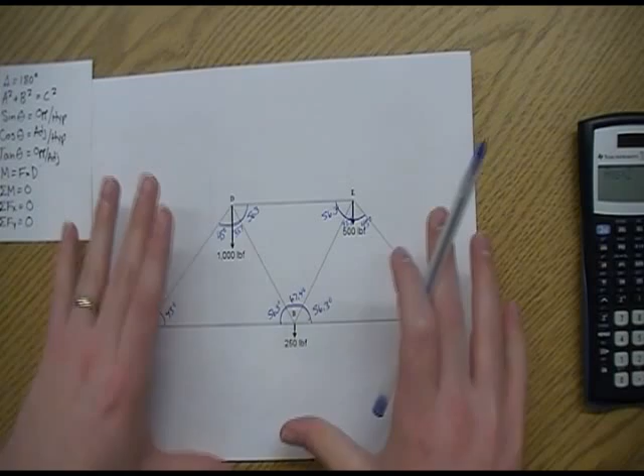Now the problem is this: for these ones right here, there's 2 unknowns, so we can't just say cut it in half and put some here and some here. It doesn't work. We still have to solve for it mathematically because it's not equal forces pushing out. We've got 1,000 pushing here, only 500 here, and only 250 here. So the forces aren't going to be equally distributed amongst this truss, and we've got to figure that out.

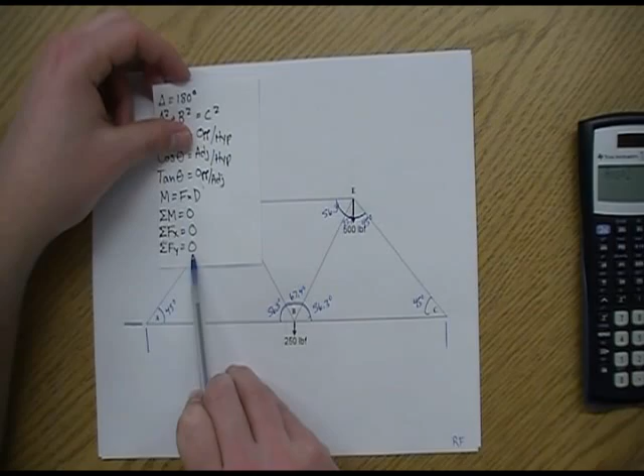One thing we do know right away, we're going to come back to here: the sum of all the forces in the x direction have to equal 0, and the sum of all the forces in the y direction have to equal 0. So I always like to draw this guy in like this.

And you'll see this a lot. These are positive forces, and these are negative forces. So whatever way they're pointing, I can give them a positive or negative association. Right off the get-go, this is the x direction, side to side, and y is up and down.

All of these forces are pushing up or down. These ones have to be pushing up or down. These ones are pushing down. But this guy over here is pushing side to side—he's in the x direction. If there's no other forces, then he has to be 0, just by the simple rule of the formula.

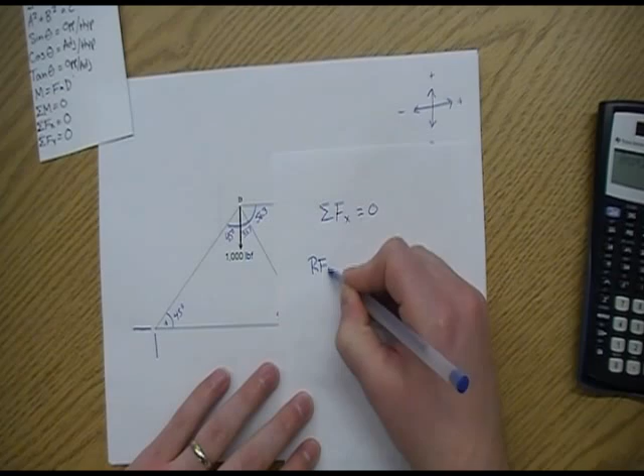Like the formula stated, the sum of all the forces in the x direction has to equal 0. Well, if there's only one force—this is the reaction force at pin A in the x direction—plus, and there's nothing else to add it to, it's going to equal 0. There's nothing there for it to push against, so this guy is 0.

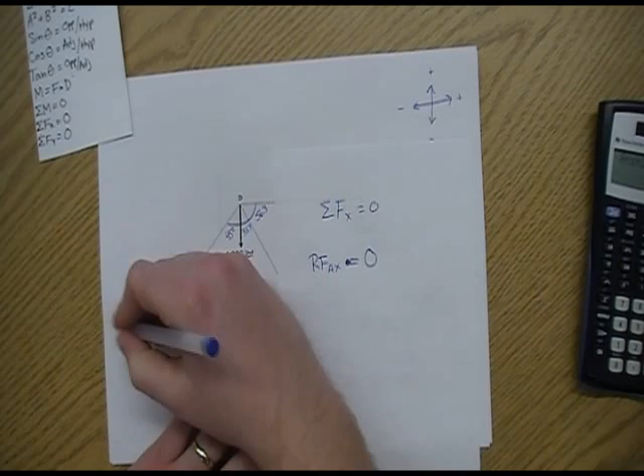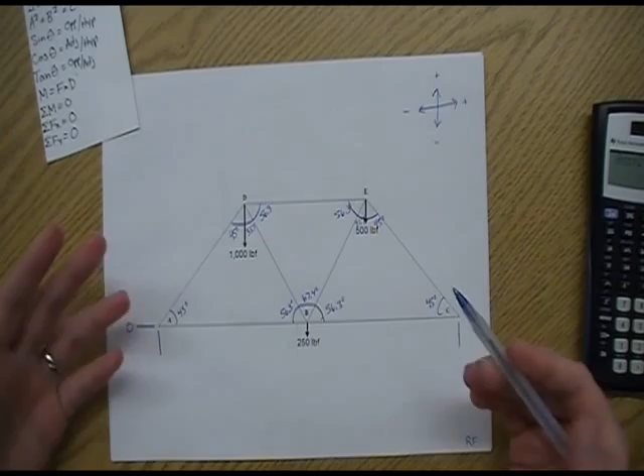He's a nothing. These guys here, we can't just add up because there's 2 unknowns—we just don't know what they are. So in order to get rid of one of the unknowns, we're going to use this formula here of moment. Using moment, we can get rid of one of these guys and just get down to one unknown, and we'll show you how that works.

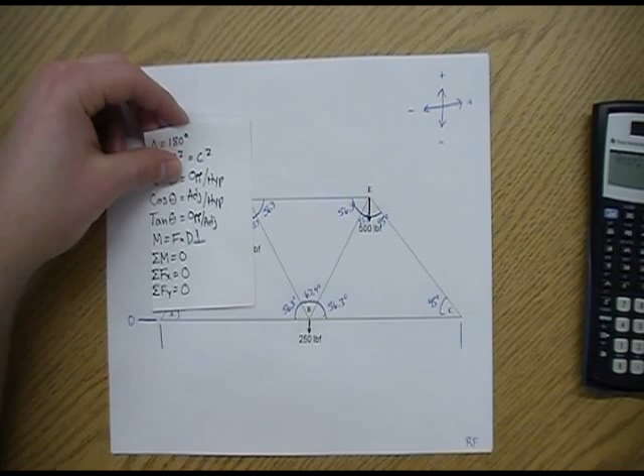The formula for moments is this, it's twofold: the sum of all the moments equals 0. Well, what is a moment? You find moment by multiplying the force times the perpendicular distance. You should have this little thing there for perpendicular distance from a given point. So how are we going to do that?

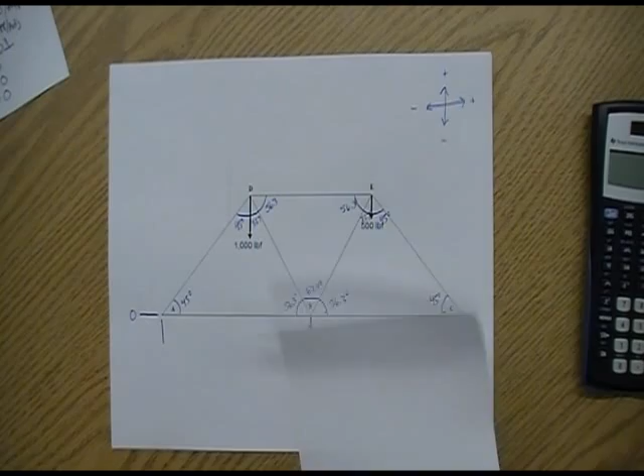Well, we need to pick a point, and for us, we're going to pick this one right here, point A. Now we need to just start finding out what all of our moments are, because remember, when we add them all up, they have to equal 0.

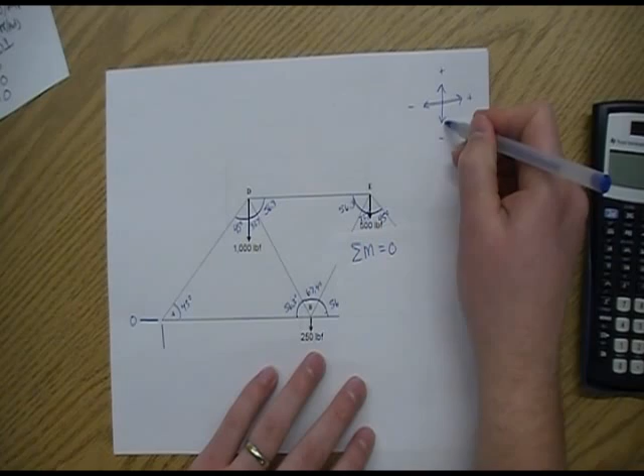Well, what are our moments? Let's start with this one right here. Here's our pin—what is the perpendicular distance if the force is going up and down, to where that force is being applied? So if here's our point, you remember this was 3. Our force is negative because it's pointing down. Moment equals force times distance, so for this guy it's negative 1,000, and our distance is 3. So that's 3 times negative 1,000—that's our first one.

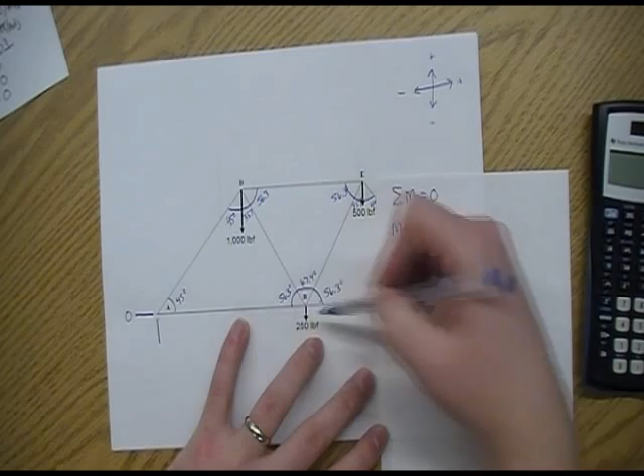What about our next one? Well, the distance from the pin to where the force is being applied, the perpendicular distance—if the force is running up and down, what's the distance running this way? This is going to be 3, and then we remember this was 2, so the total distance is 5. And what's our force? Negative 250.

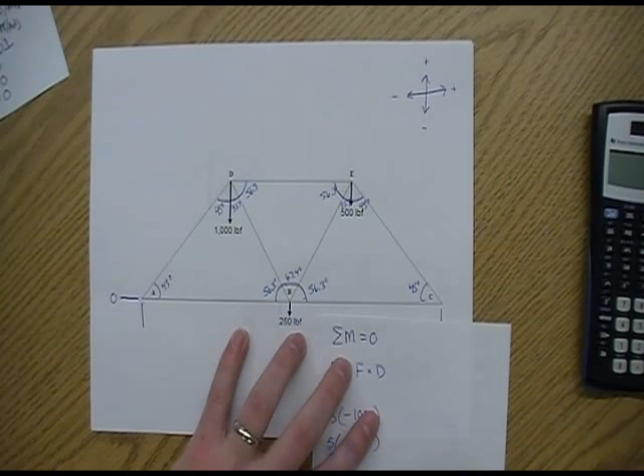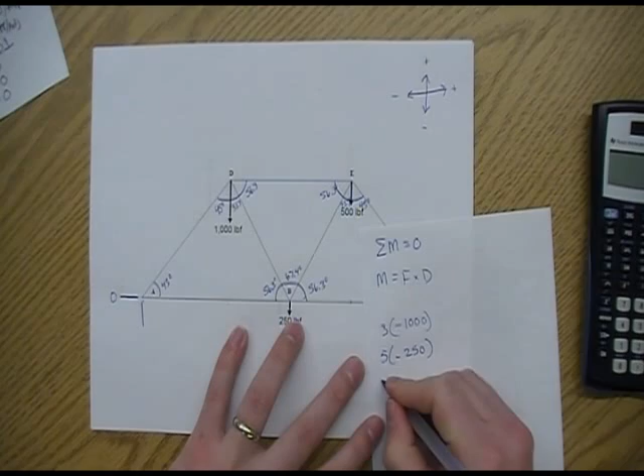Then we have this guy here. What's our distance? Well, from the pin, this was 3, then we went 2 more, that takes us to 5. We take 2 more—remember the perpendicular distance—so what's this length from here to here? That's going to be 7. And what's our force? Negative 500, it's pushing down.

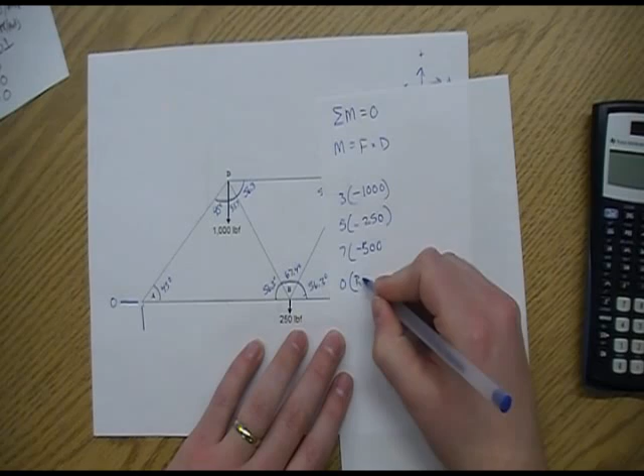And then we have these two guys. Now, like I said, when we do the moment calculation, we were going to get rid of this one—I'll show you why here right now. What is the distance of this force from point A? It's 0, so the distance is 0. And what's the force? Well, we don't know, but we know it's the reaction force at A in the y direction—that's how we write that.

What about this guy here? Well, what's the distance from here to here? All the way across it, halfway was 5, the rest is going to be 10. So our distance is 10.

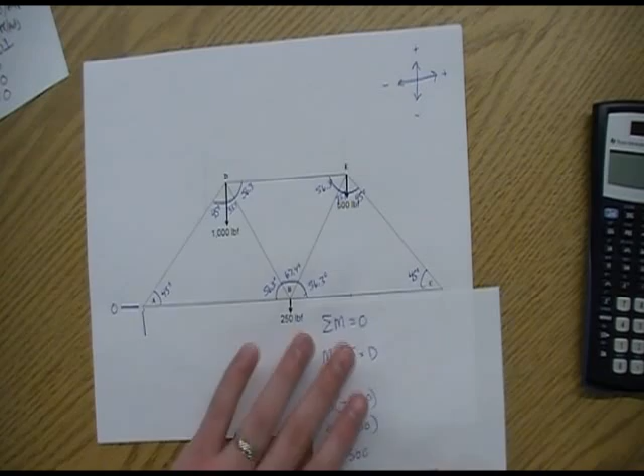And what's our force? Well, we don't know, so we give it a name, and it's going to be the reaction force at C in the y direction. Reaction force, I'll move this over here.

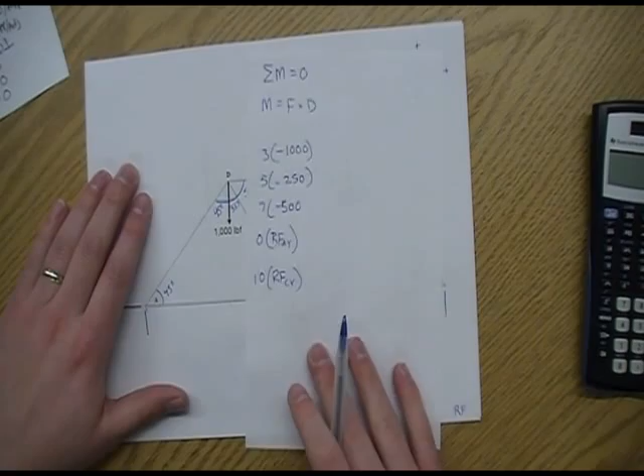So now, according to this formula right here, the sum, when we add up all of these moments, once we calculate them, it should equal 0. So let's do it.

What's 3 times negative 1,000? It's going to be negative 3,000. 5 times negative 250, we're going to get negative 1,250. 7 times negative 500 is negative 3,500. 0 times this unknown, well, anything times 0 equals 0, and that's how we get rid of this guy. Boop, 0. We just got rid of him.

So the only unknown that's left is this. And then we just say that this equals 10 times, because we can't solve it yet, the reaction force at C in the y direction. So if I were to add these together, it should equal 0.

Well, let's add these guys together, and I'll do it here on my calculator. It's negative 3,000 plus negative 1,250 plus negative 3,500. So these guys together equal negative 7,750.

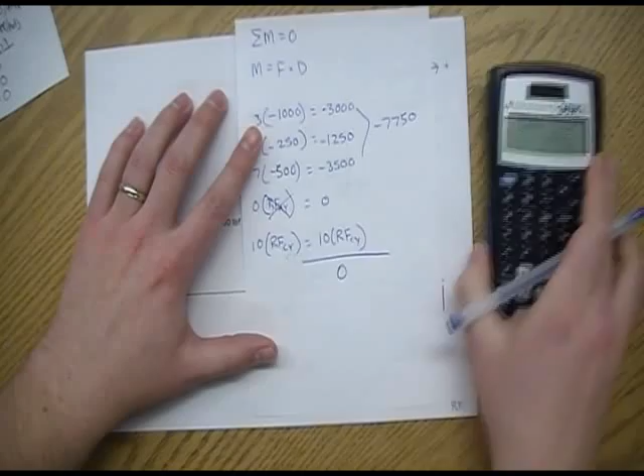So I'm going to rewrite this formula again, the sum of all the moments. Well, I added these 3 up. I could add 0, it's not going to do anything. So it's negative 7,750 plus, and then it's 10 times the reaction force at C in the y direction equals 0.

Well, let's get this reaction force by itself. So we're going to add 7,750 to both sides. These are going to cancel out. So 10 times the reaction force at C in the y direction equals

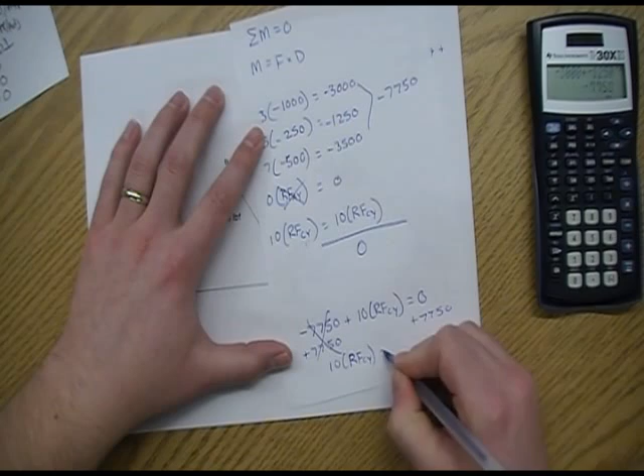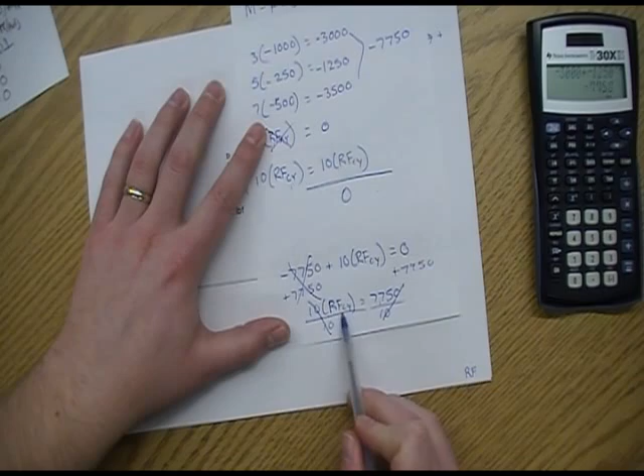7,750. Well, how do you get the reaction force by itself? We're just doing simple algebra. We divide both sides by 10. And you're going to find out that the reaction force, that's going to cancel. And then these zeros are going to cancel out here. You're left with 775. So this reaction force, the reaction force at C in the y direction is 775.

It's positive 775. So which direction? Well, it's in the y direction, and it's positive, so it's going to be going up at 775.

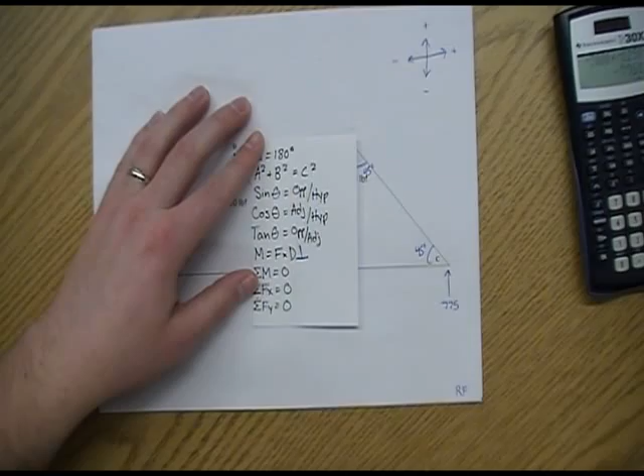Now we can use the sum of all the forces in the y direction, have to equal 0. Because we only have one unknown now, and we can solve for that last unknown. So let's rewrite our equation. The sum of all the forces in the y direction have to equal 0. Now we're talking about forces, not moments anymore, just straight up forces.

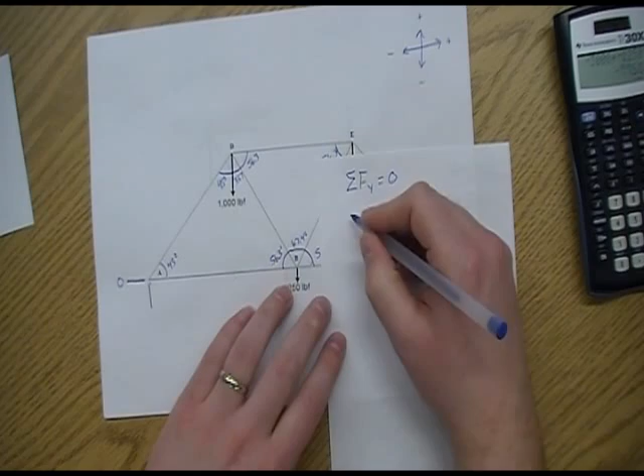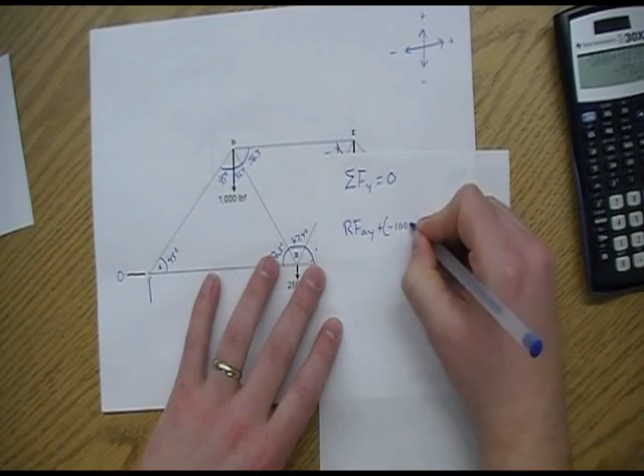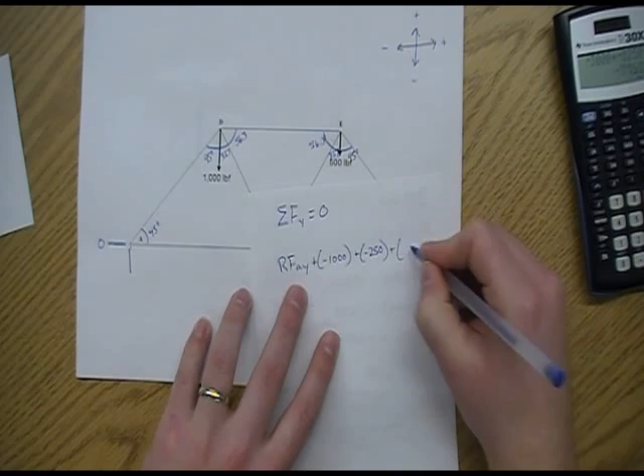So let's list all of our forces. Well, we have the reaction force at A in the y direction, plus, okay, this guy's pointing down, plus negative 1,000, plus negative 250, plus, we got negative 500 here, and I'm running out of room, plus, I can fit it in here, 775.

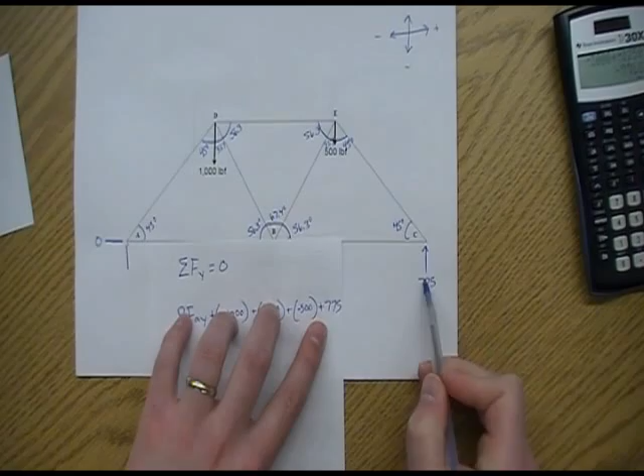775. He's positive, remember, he's going up. These guys are all going down, so they're all negatives. If it's going up, it's a positive. If they're going down, it's negative.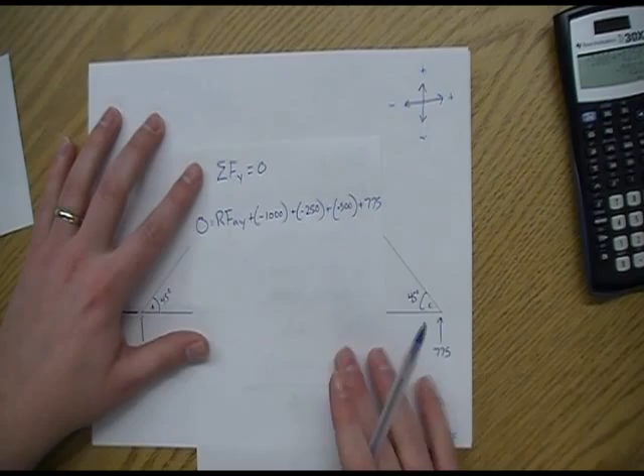So all of this should equal 0. When we add up all those, it should equal 0. Because all the external forces have to be in static equilibrium. So let's hurry up and just combine these. Whenever you add negatives, it just makes a larger negative number.

So we have reaction force at A in the y direction, and then we have 1,000, 1,250, 1,750. So plus negative 1,750, plus 775, and we can actually combine these two numbers.

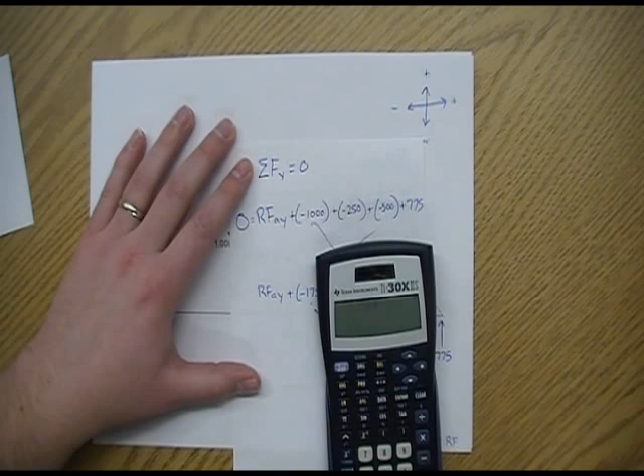And I'll do it on my calculator for you to see here. Negative 1,750 plus 775, what do we get? Negative 975. So reaction force at A in the y direction.

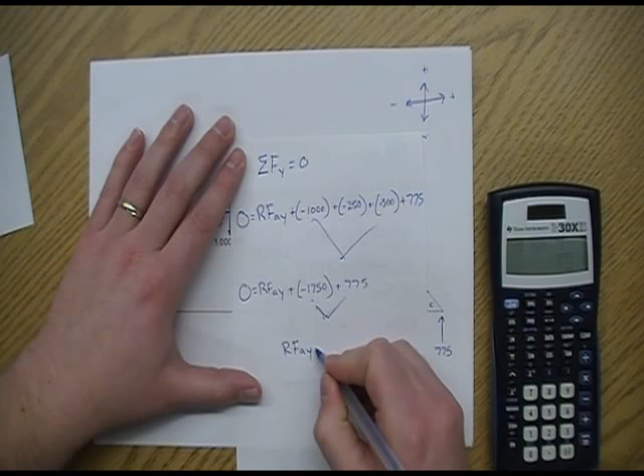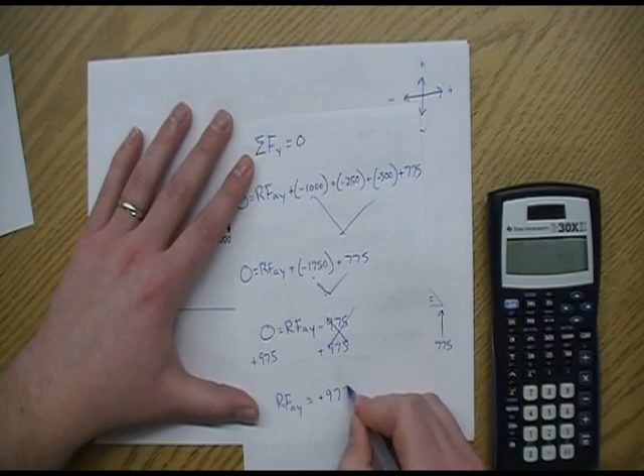A positive 975. And we know positive is going up. So a positive up 975.

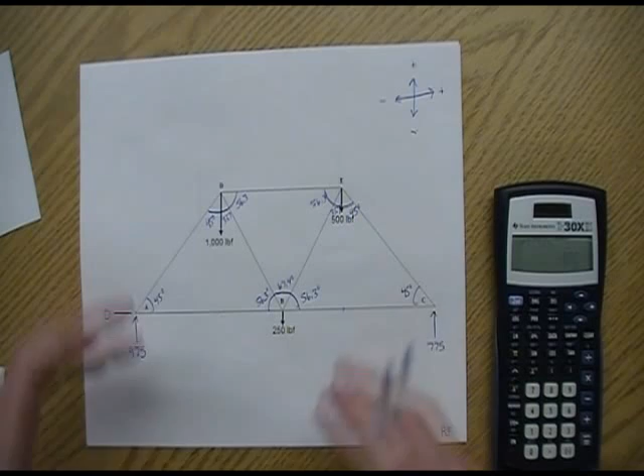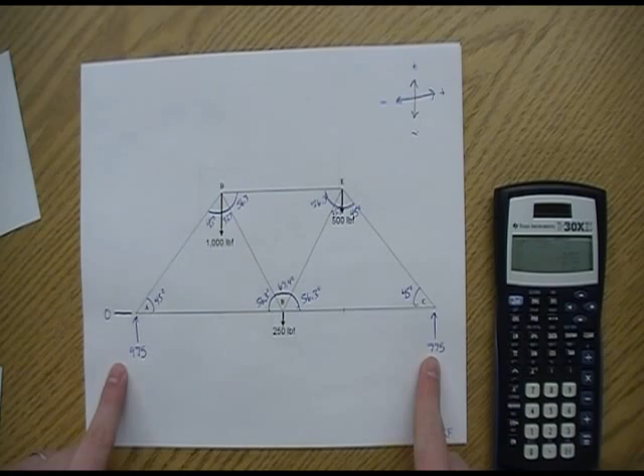So now we've solved all the angles, we've solved all the external forces. And this truss, all the external forces are in equilibrium. They're all accounted for. There's a total of 1,750 pounds pushing down, and there's a total of 1,750 pounds pushing up. And there's a total of 0 pushing side to side. This one's all by itself. There's no other forces, so therefore this must be 0.

From here, we are now going to move into free body diagrams, which you will see here in the next video.